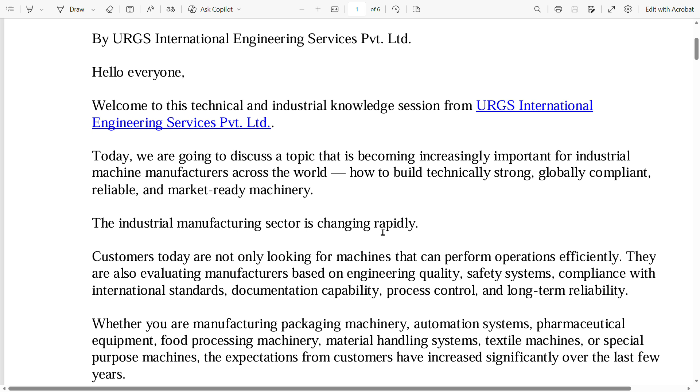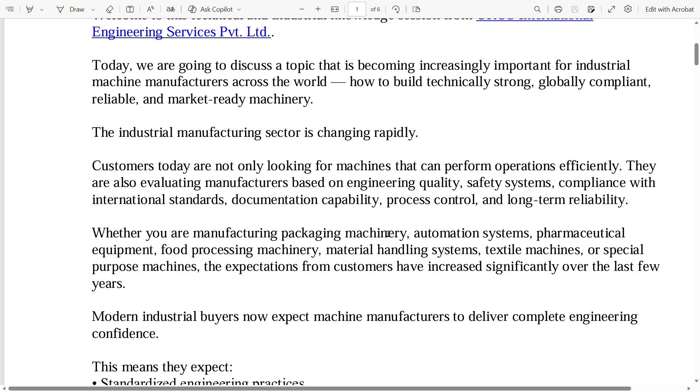The industrial manufacturing sector is changing rapidly. Customers today are not only looking for machines that can perform operations efficiently, they are also evaluating manufacturers based on engineering quality, safety systems, compliance with international standards, documentation capability, process control, and long-term reliability. Whether you are manufacturing packaging machinery, automation systems, pharmaceutical equipment, food processing machinery, material handling systems, textile machines, or special purpose machines, the expectations from customers have increased significantly over the last few years.

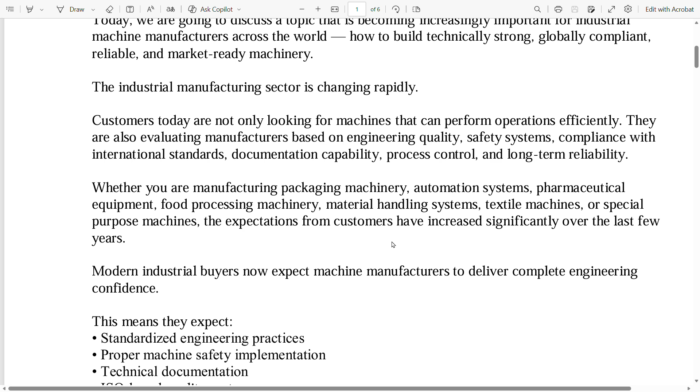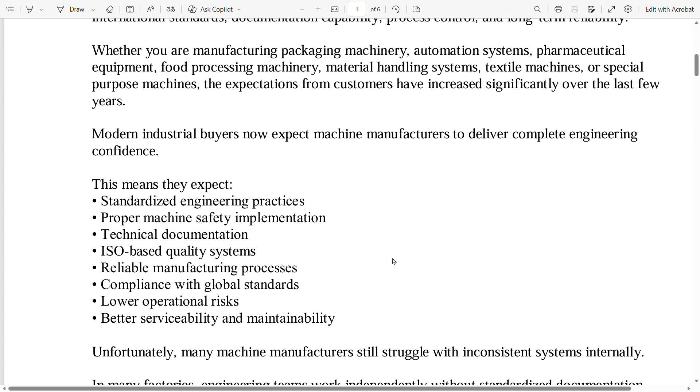Modern industrial buyers now expect machine manufacturers to deliver complete engineering confidence. This means they expect standardized engineering practices, proper machine safety implementation, technical documentation, ISO-based quality systems, reliable manufacturing processes, compliance with global standards, lower operational risks, better serviceability and maintainability.

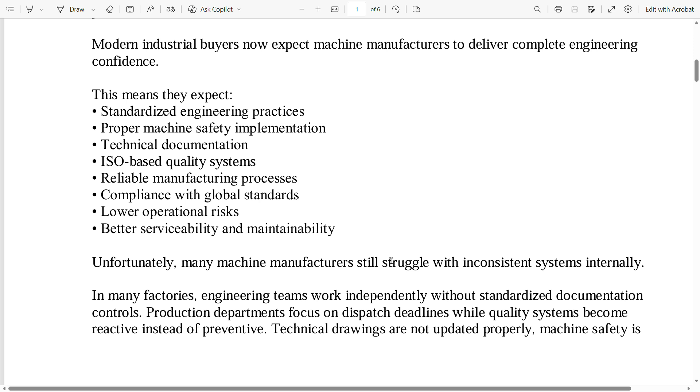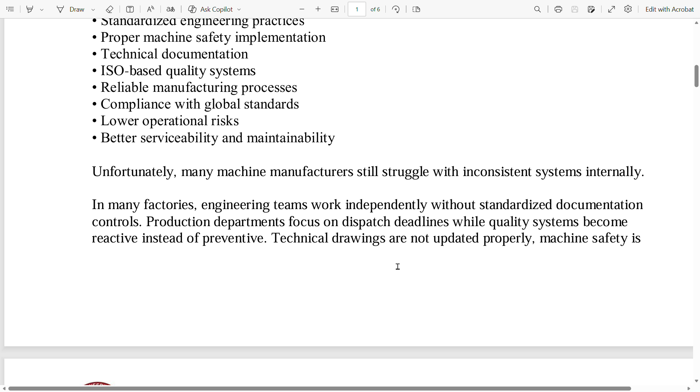Unfortunately, many machine manufacturers still struggle with inconsistent systems internally. In many factories, engineering teams work independently without standardized documentation controls. Production departments focus on dispatch deadlines, while quality systems become reactive instead of preventive.

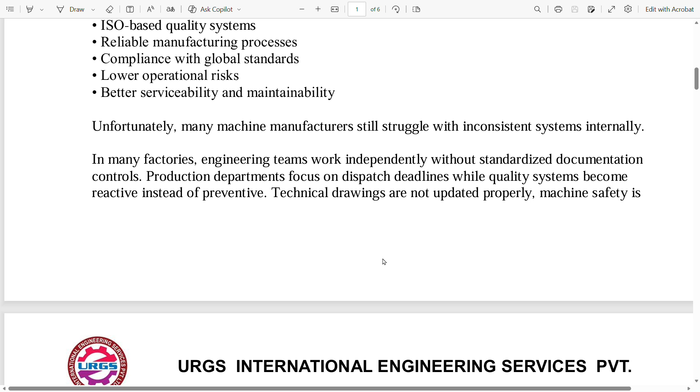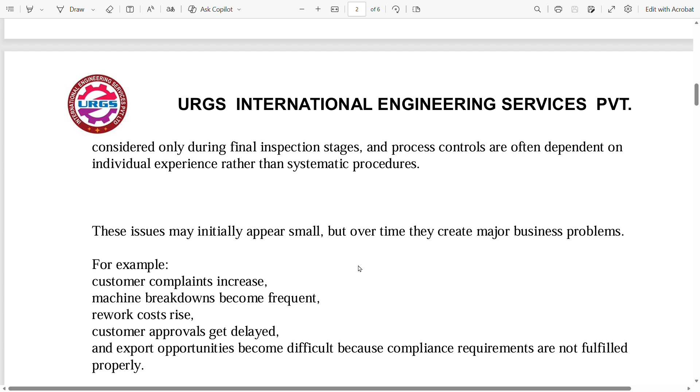Technical drawings are not updated properly. Machine safety is considered only during final inspection stages, and process controls are often dependent on individual experience rather than systematic procedures. These issues may initially appear small, but over time they create major business problems.

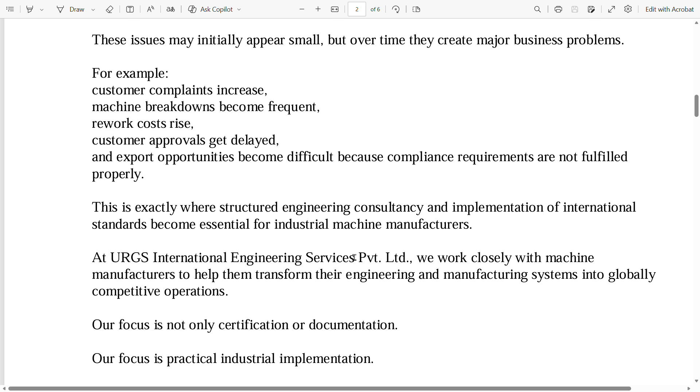For example, customer complaints increase, machine breakdowns become frequent, rework costs rise, customer approvals get delayed, and export opportunities become difficult because compliance requirements are not fulfilled properly.

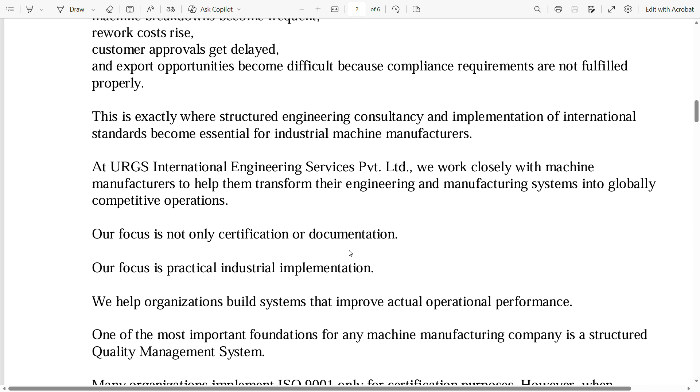This is exactly where structured engineering consultancy and implementation of international standards become essential for industrial machine manufacturers. At URGS International Engineering Services Private Limited, we work closely with machine manufacturers to help them transform their engineering and manufacturing systems into globally competitive operations.

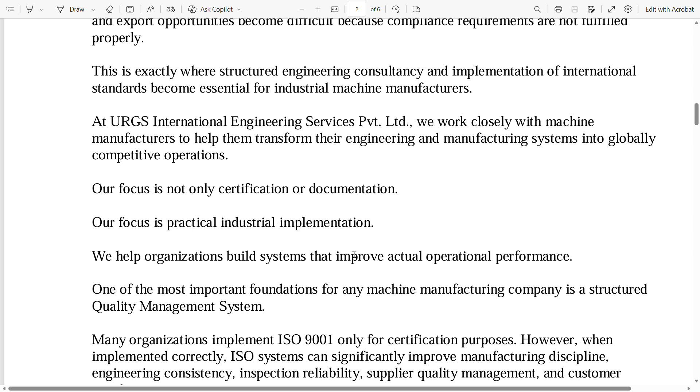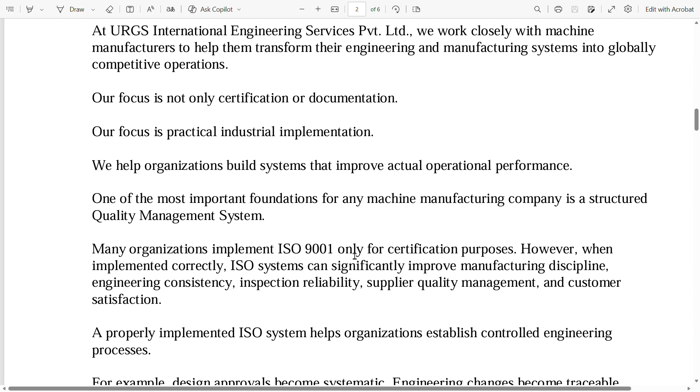Our focus is not only certification or documentation. Our focus is practical industrial implementation. We help organizations build systems that improve actual operational performance.

One of the most important foundations for any machine manufacturing company is a structured quality management system. Many organizations implement ISO 9001 only for certification purposes. However, when implemented correctly, ISO systems can significantly improve manufacturing discipline, engineering consistency, inspection reliability, supplier quality management, and customer satisfaction. A properly implemented ISO system helps organizations establish controlled engineering processes.

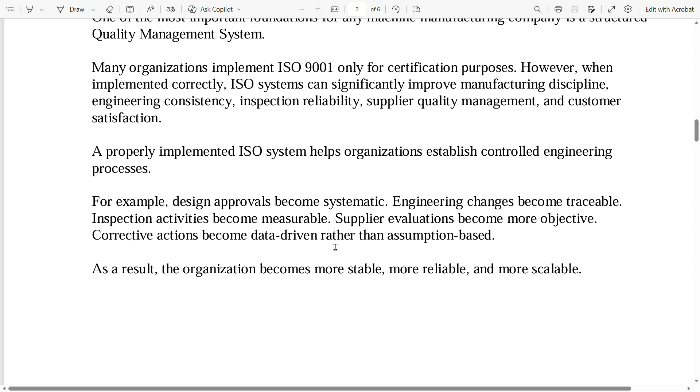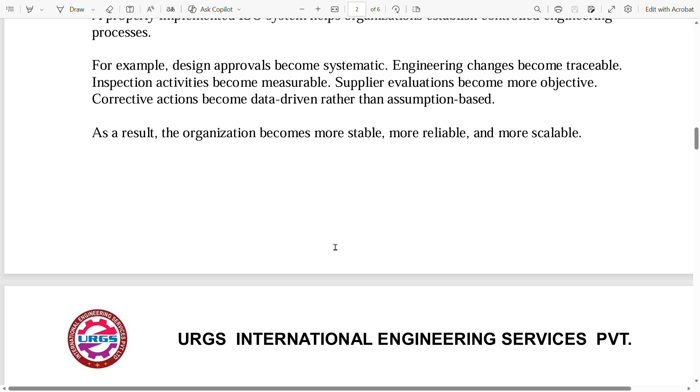For example, design approvals become systematic, engineering changes become traceable, inspection activities become measurable, supplier evaluations become more objective, corrective actions become data-driven rather than assumption-based. As a result, the organization becomes more stable, more reliable, and more scalable.

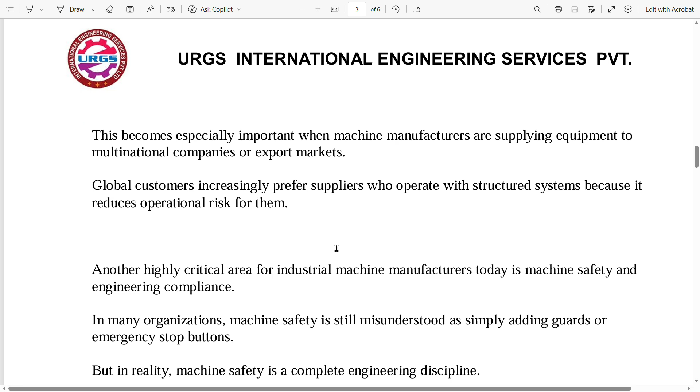This becomes especially important when machine manufacturers are supplying equipment to multinational companies or export markets. Global customers increasingly prefer suppliers who operate with structured systems because it reduces operational risk for them.

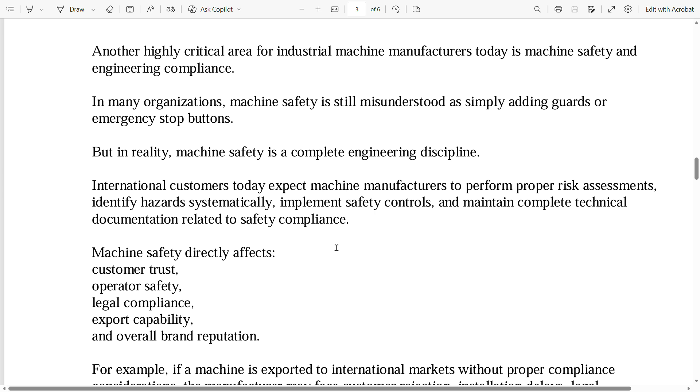Another highly critical area for industrial machine manufacturers today is machine safety and engineering compliance. In many organizations, machine safety is still misunderstood and seen as simply adding guards or emergency stop buttons. But in reality, machine safety is a complete engineering discipline.

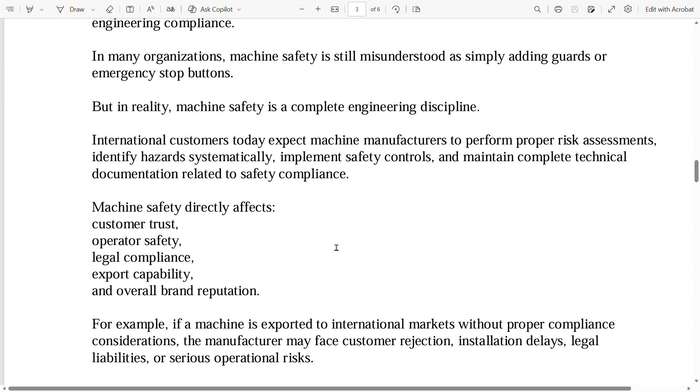International customers today expect machine manufacturers to perform proper risk assessments, identify hazards systematically, implement safety controls, and maintain complete technical documentation related to safety compliance. Machine safety directly affects customer trust, operator safety, legal compliance, export capability, and overall brand reputation.

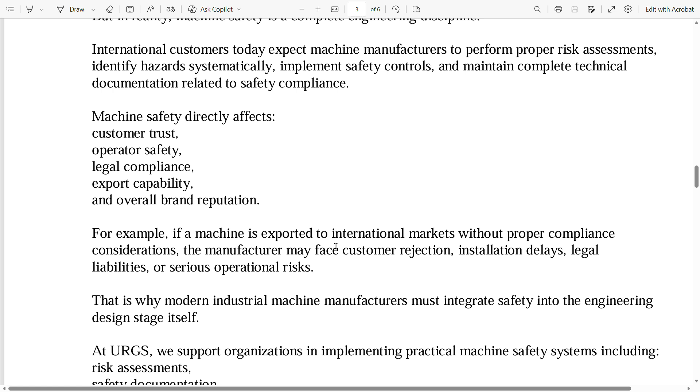For example, if a machine is exported to international markets without proper compliance considerations, the manufacturer may face customer rejection, installation delays, legal liabilities, or serious operational risks.

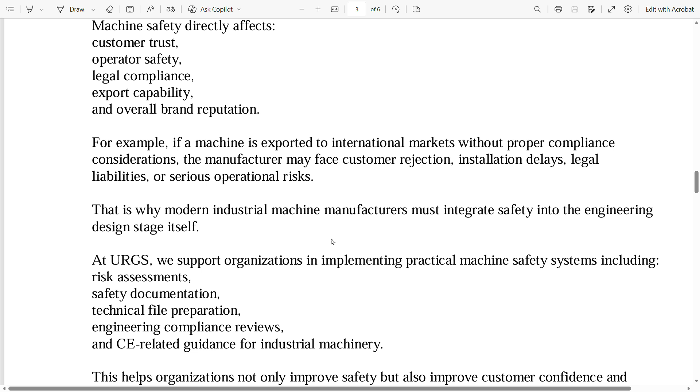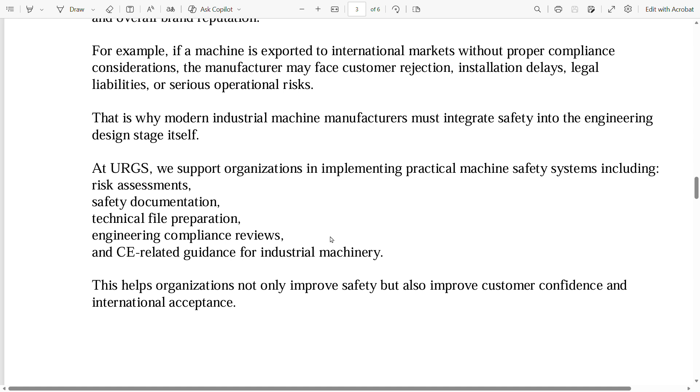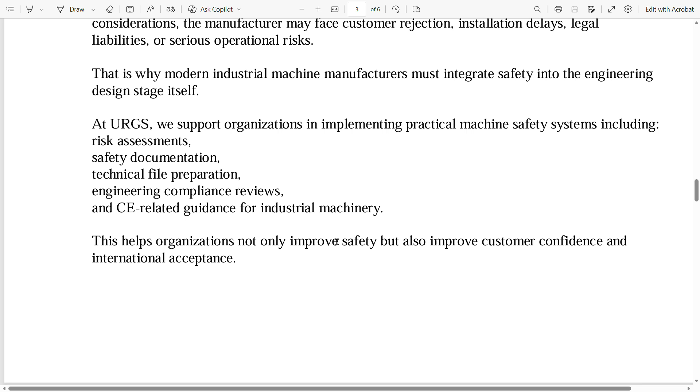That is why modern industrial machine manufacturers must integrate safety into the engineering design stage itself. At URGS International, we support organizations in implementing practical machine safety systems, including risk assessments, safety documentation, technical file preparation, engineering compliance reviews, and CE-related guidance for industrial machinery. This helps organizations not only improve safety but also improve customer confidence and international acceptance.

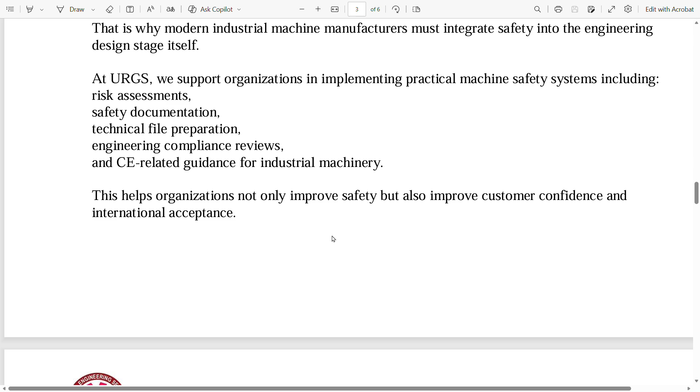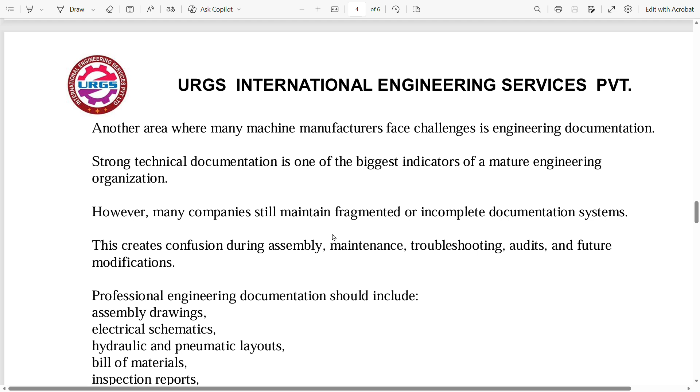Another area where machine manufacturers face challenges is engineering documentation. Strong technical documentation is one of the biggest indicators of a mature engineering organization. However, many companies still maintain fragmented or incomplete documentation systems. This creates confusion during assembly, maintenance, troubleshooting, audits, and future modifications.

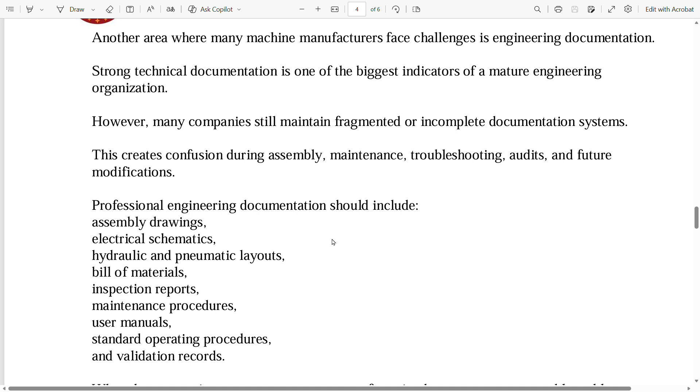Professional engineering documentation should include assembly drawings, electrical schematics, hydraulic and pneumatic layouts, bill of materials, inspection reports, maintenance procedures, user manuals, standard operating procedures, and validation records.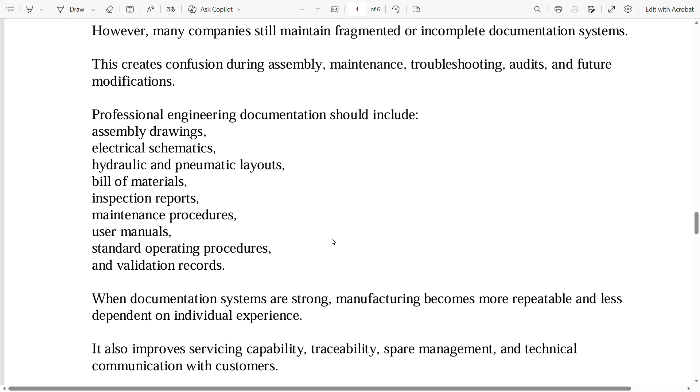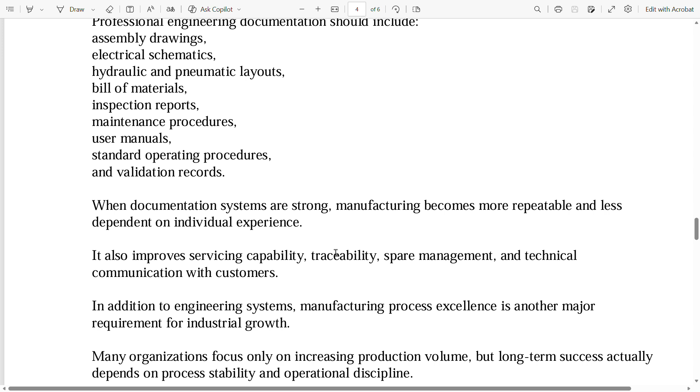When documentation systems are strong, manufacturing becomes more repeatable and less dependent on individual experience. It also improves servicing capability, traceability, spare management, and technical communication with customers.

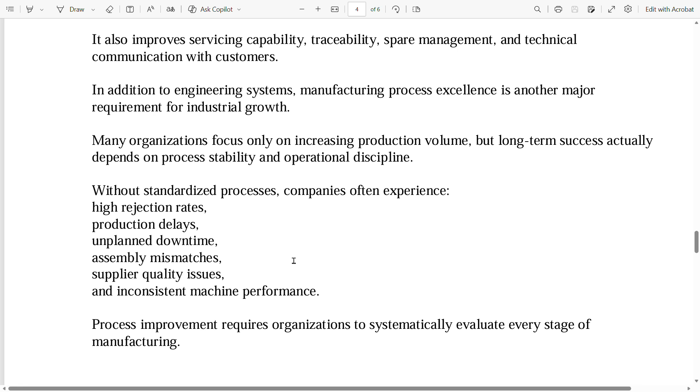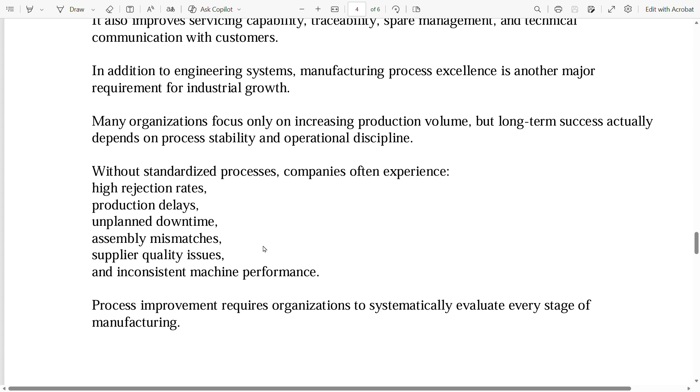In addition to engineering systems, manufacturing process excellence is another major requirement for industrial growth. Many organizations focus only on increasing production volume, but long-term success actually depends on process stability and operational discipline. Without standardized processes, companies often experience high rejection rates, production delays, unplanned downtime, assembly mismatches, supplier quality issues, and inconsistent machine performance.

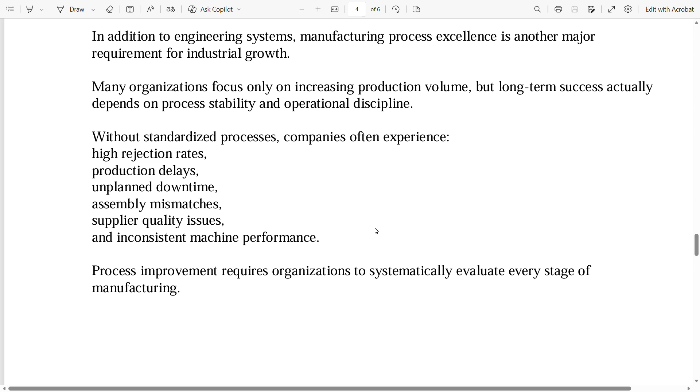Process improvement requires organizations to systematically evaluate every stage of manufacturing. This includes material flow, inspection systems, quality checkpoints, assembly controls, preventive maintenance, operator training, supplier development, and root cause analysis.

At URGS International, we help industrial machine manufacturers implement practical process improvement systems that increase productivity, reduce operational losses, and improve machine reliability. Another critical factor behind successful industrial organizations is technical competency development.

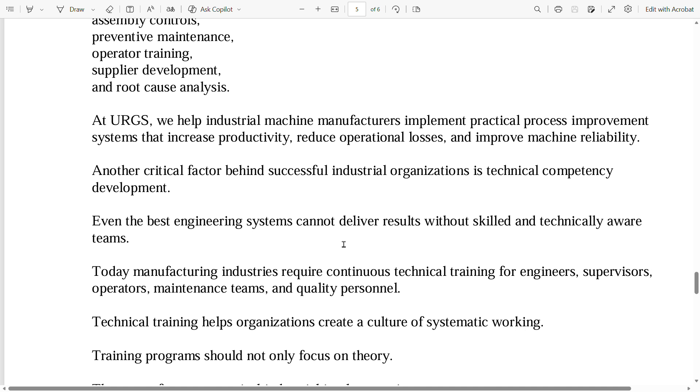Even the best engineering systems cannot deliver results without skilled and technically aware teams. Today, manufacturing industries require continuous technical training for engineers, supervisors, operators, maintenance teams, and quality personnel. Technical training helps organizations create a culture of systematic working.

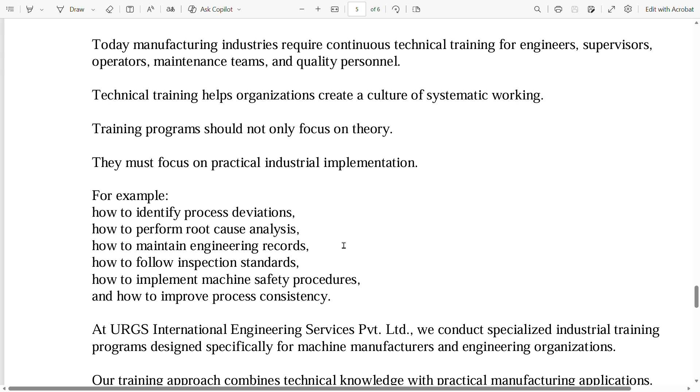Training programs should not only focus on theory, they must focus on practical industrial implementation. For example, how to identify process deviations, how to perform root cause analysis, how to maintain engineering records, how to follow inspection standards, how to implement machine safety procedures, and how to improve process consistency.

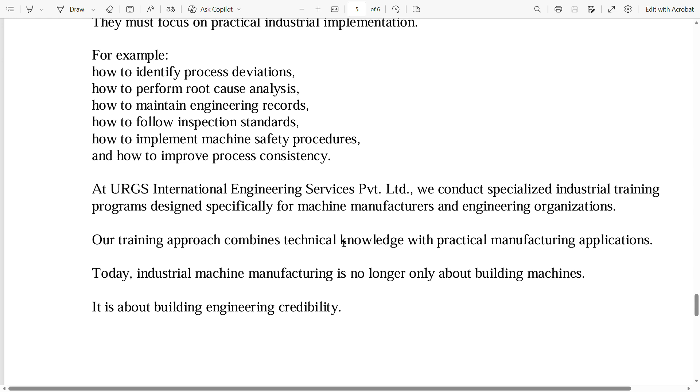At URGS International Engineering Services Private Limited, we conduct specialized industrial training programs designed specifically for machine manufacturers and engineering organizations. Our training approach combines technical knowledge with practical manufacturing applications.

Today, industrial machine manufacturing is no longer only about building machines, it is about building engineering credibility. Organizations that establish strong engineering systems, structured compliance frameworks, process discipline, and technical competency are the ones that achieve sustainable growth in global markets. This is why many successful manufacturers now work closely with technical consultancy partners

who support them in engineering compliance, ISO systems, machine safety, process optimization, technical documentation, and industrial training.

At URGS International, our mission is to help industrial machine manufacturers strengthen their engineering foundations and become globally competitive manufacturing organizations. We believe that engineering excellence is not achieved through documentation alone. It is achieved through systematic implementation, technical discipline, process control, and continuous improvement.